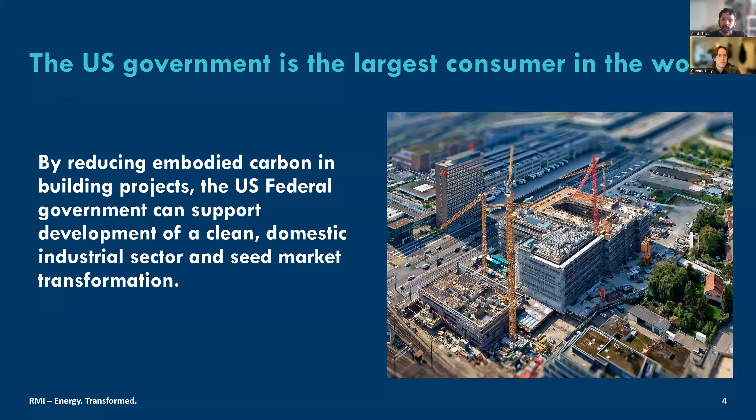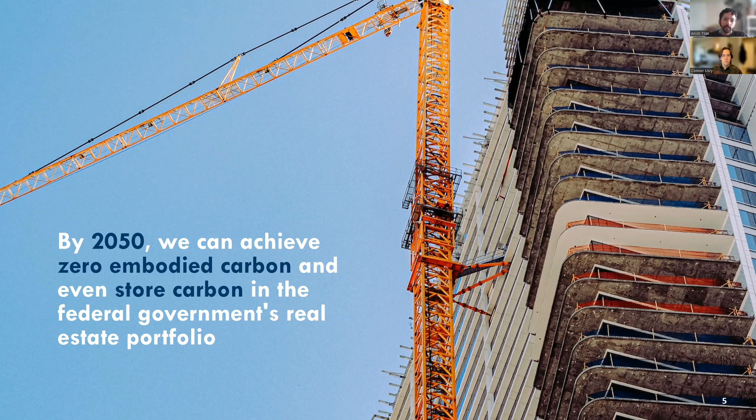Our top line finding from our analysis is that by 2050, the federal government can achieve not just zero embodied carbon from building projects, but actually we can store carbon in the federal government's real estate portfolio. So that's a really exciting opportunity and unique in embodied carbon.

So our agenda for today is that we're providing a broad overview and some context of what we did. And then we'll dive into some details about Buy Clean, which many of you have likely heard about. That's an increasingly common policy to address embodied carbon in the built environment. So we drill into some details about Buy Clean and what's happening at the federal level under the Biden administration. And then we'll touch on some of the strategies to address embodied carbon beyond Buy Clean, looking at buildings more holistically and thinking about other strategies beyond focusing on specific material sectors.

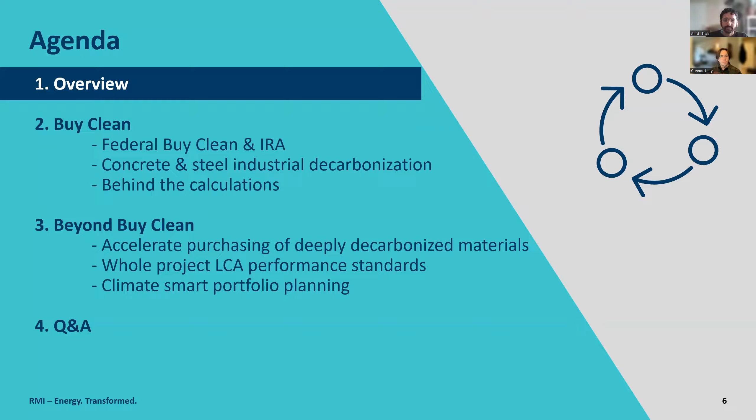So while we focused our analysis in this specific report on the US federal government's portfolio, we believe that the information in the report is really a comprehensive framework for addressing embodied carbon that policymakers at the local and state level, as well as private real estate portfolio owners, can also use. So this isn't so niche that we're focused just on one portfolio. This is really something that anyone should be able to pick up and deploy in their real estate work.

And with that, I'll hand it off to Connor to just give us some context and get into Buy Clean. Cool, thanks, Anish. So before we jump into some of the calculations, I just wanted to give a quick refresher on what embodied carbon actually is for those of you who are a little less familiar. So embodied carbon is the carbon in construction associated with the lifetime of a building. It ranges from raw material extraction to the emissions during transportation of materials, all the way to the end of life when you're dealing with deconstruction, disposal, or recycling of materials. So essentially everything outside of the operational carbon that's used.

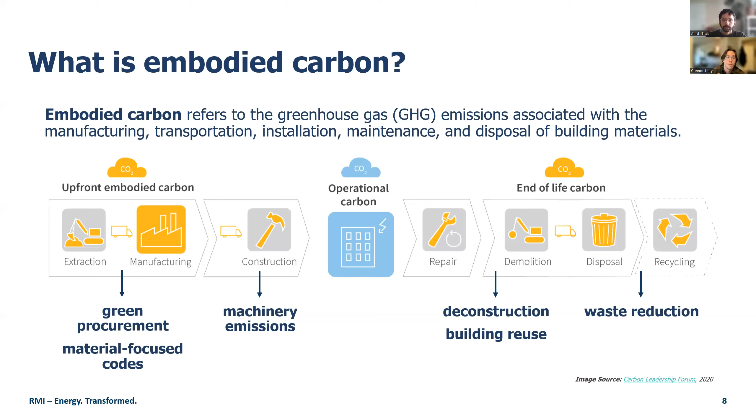Next slide. So embodied carbon is really significant. The emissions from concrete and steel industries alone account for about 21% of total global emissions. And most of the products from these industries are being used in the built environment. So as a result, policies that target these emissions, such as building code language and procurement policies, are really effective in addressing and reducing some of these emissions.

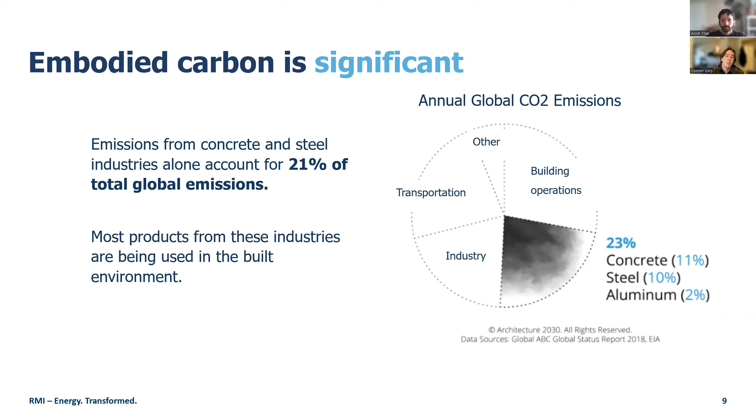But we should be looking at this not only in terms of having really large greenhouse gas emissions reduction potential, but also as an opportunity to reap a lot of different co-benefits. That's anything from improving air quality and pollution levels in areas near industrial manufacturing, all the way to supporting regional and local manufacturing and innovation. And it's also really cost effective. RMI has produced a couple of reports of late that have shown that emissions from materials we purchase for construction can be reduced by up to 46% with little to no added cost. Next slide, please.

So, in order to actually get the federal government to reduce its embodied carbon emissions, our team has developed a roadmap that's based on 4 primary strategies. The first, and the one that the government is really actively working on already, is developing a robust buy clean procurement program, which sets emission standards and targets for building materials, especially the large and important ones that we'll talk about here in a bit.

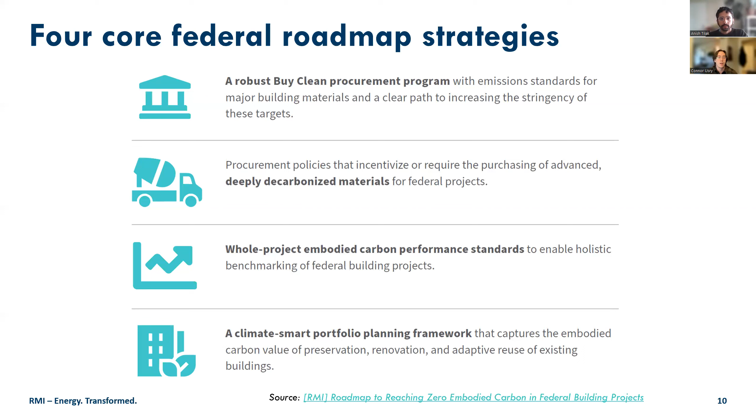The second is investing in the future of building materials by setting procurement policies that encourage the use of deeply decarbonized building materials for federal projects that's outside of the typical ones. The third is setting whole project embodied carbon performance standards to look beyond individual building materials and consider the project as a whole. And then lastly is setting a portfolio planning framework that'll capture the significance of embodied carbon throughout the various stages of the life of a building. Next slide.

So our roadmap focused on 2 core ways of approaching embodied carbon evaluation and reduction. We'll dive into those specifics throughout the next hour, but I just wanted to highlight the estimated impacts up front. So the first impact projection is from widespread implementation of buy clean targets that we're going to recommend. And then the second impact projection is that we see even greater potential for reduction by emphasizing performance standards through whole project lifecycle assessments rather than just focusing on individual materials.

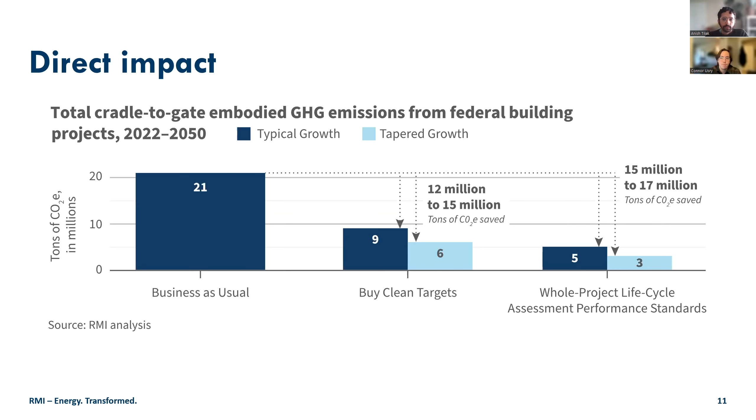All of this is going to be in relation to projected emissions that we calculated that the federal government will emit if it operates its portfolio in the same way that it already has been. Next slide. So first, we'll take a look at that buy clean approach that I mentioned in the first part of the last slide.

So buy clean as a whole, what is it? Buy clean is a policy that is being used or evaluated at least in a number of different states across the US already. Essentially, what it does is it sets procurement standards for common carbon intensive building materials. And since the government, as Anish mentioned before, has enormous purchasing power, its procurement stipulations can help drive the market

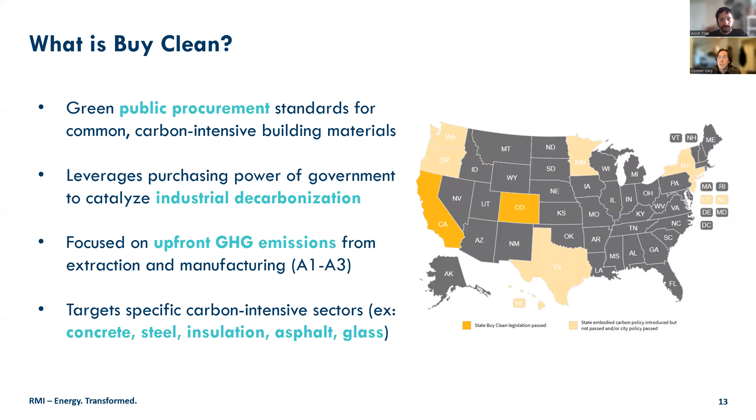towards lower embodied carbon. It's focused predominantly on the upfront greenhouse gas emissions of building materials from the extraction and the manufacturing, but it still yields results throughout the lifespan of a project. And it targets really specific carbon intensive sectors, such as concrete, steel, insulation, asphalt, and glass. Next slide.

So what does this mean for the federal government in particular? Well, the federal government is the largest consumer in the world. It spends somewhere in the range of $650 billion on products and services every year, and it has a portfolio of about 2.8 billion square feet. So a push to procure lower embodied carbon materials will actually help shift the US market as a whole towards those lower embodied carbon materials.

Last fall, in 2021, the Biden administration issued an executive order making buy clean a priority for the federal government, which was a huge step. And what that stated is that the federal government is going to focus on developing pilots for low embodied carbon procurement in order to push those lower emission standards for key materials. Those key materials, I'll cover in a second.

But this fall, after assembling a task force across various federal agencies, they stated that those materials were going to be concrete, steel, asphalt, and flat glass. And those are going to be the priority projects or priority materials for buy clean. In addition to those pilots, the executive order stated that they were going to focus on collecting and publicly disclosing environmental performance data. And they're also going to be streamlining emissions reporting as a whole. Next slide.

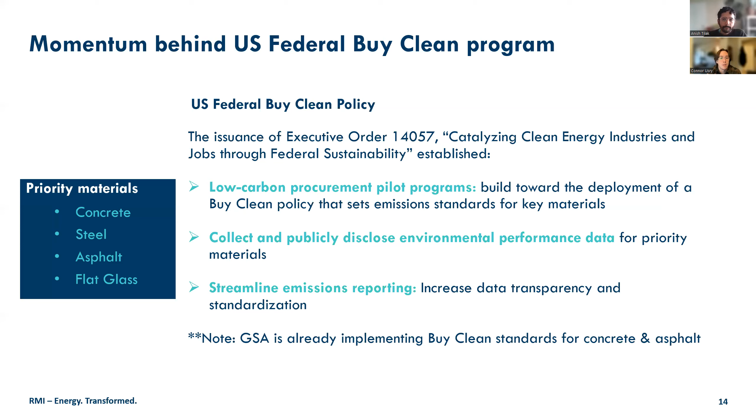So the priority materials that Buy Clean announced came on the heels of the historic Inflation Reduction Act, or IRA, this fall. And among a lot of other things, it's going to advance the market for low embodied carbon materials in buildings through a few different levers. The first is a $250 million program that'll help building manufacturers develop environmental product declarations, or EPDs. These are something similar to nutrition labels for materials to help people understand how much carbon is being used in the production and transportation and use of them.

$100 million is going to go towards supporting the creation of a national eco label for low carbon materials. That's similar to the successful Energy Star program that you see stamped on the back of washing machines and dryers and microwaves these days. And then in addition to that, there's going to be $2 billion that are put towards enabling the GSA to buy and to use low embodied carbon materials for construction projects.

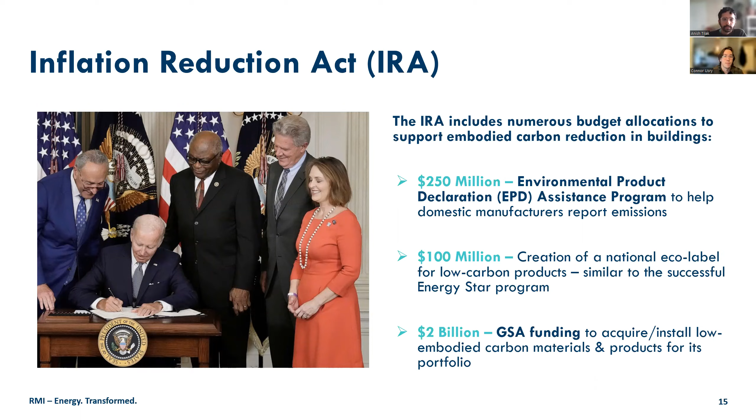Next slide. So shifting back to RMI's efforts to try and help the federal government achieve some of their goals. A federal buy clean pathway, like the one that we actually proposed in our report, is going to set the US government on the right path towards reducing emissions over time.

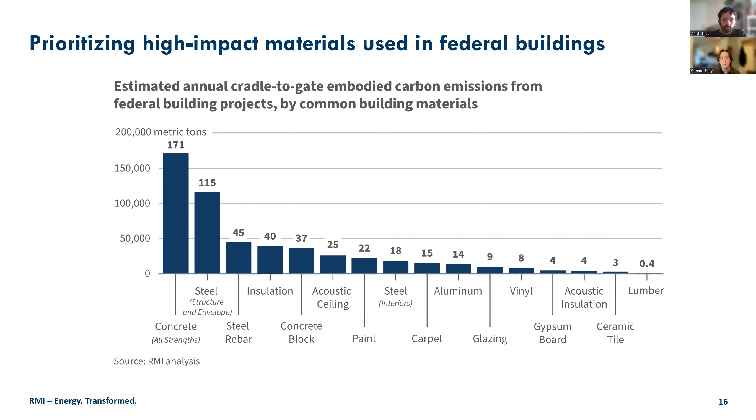So a huge part of buy clean is being able to set benchmarks and reasonable emissions expectations for different materials. For concrete in particular, what we did is we took a look at the global warming potential, or GWP, benchmarks for concrete ready mix products that are already available in the US.

So we set our 2022 benchmark in the US based upon the median environmental product declaration values that were put out by the National Ready Mix Concrete Association, the NRMCA, as well as the Global Cement and Concrete Association, GCCA. Those are roadmaps that are put out and deemed reasonable by the actual concrete manufacturers themselves.

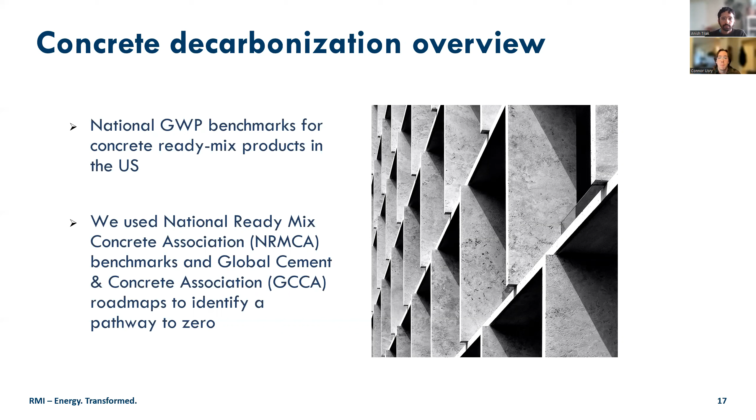So using that 2022 benchmark, we applied reasonable expectations for concrete technology improvements over the next few decades to achieve decarbonization. These included efficiencies in concrete production, savings in cement and binders, savings in clinker production, carbon capture, utilization, and storage, and then finally recarbonation.

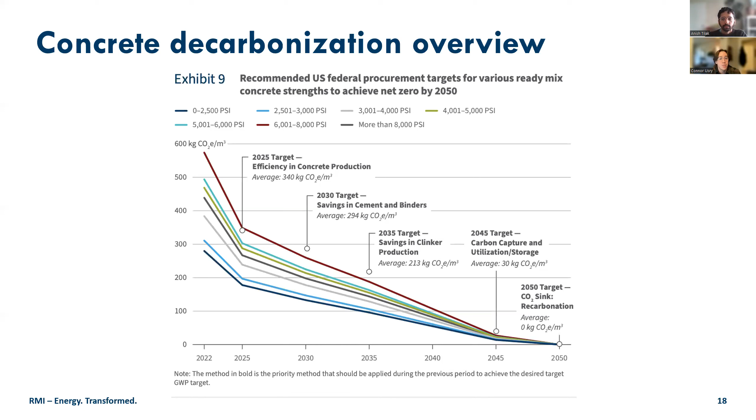Producers should find that these targets were set on a pretty reasonable timeline, given that the methods were consolidated from existing and industry inputted roadmaps. And why it's so important to have a roadmap like this is that it adds transparency to the producers of the products. And by setting these guidelines clearly, the federal government lays out what the expectations are going to be coming down the pike. Anish, if you can go to the next slide.

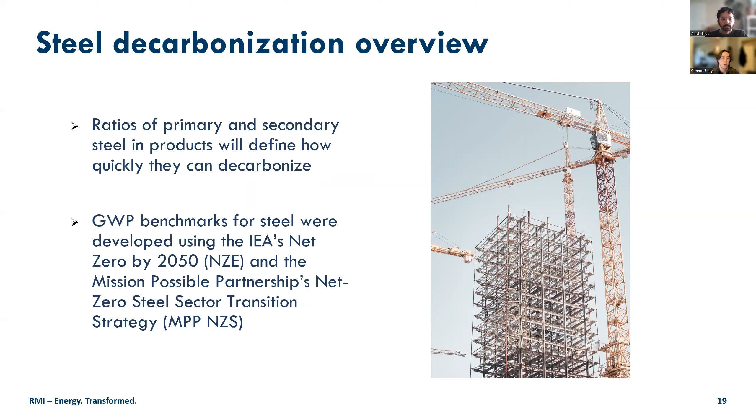So to jump into steel, we applied a very similar methodology that we did to concrete. So our analysis averaged the assumed percentage reductions from two major industry roadmaps, the IEA NZE and the MPP NZS pathways, as decade over decade scenarios to project reasonably aggressive paths towards net zero procurement of steel in 2050. If you go to the next slide.

Steel products have different paths to zero based upon their ratios of primary and secondary steel. That said, the methods responsible for decreasing embodied carbon from steel across the federal government come from the same primary levers. And those were increasing secondary steel content, electrical grid decarbonization, material efficiency improvements, technological improvements in the actual production itself, and then carbon capture, utilization, and storage.

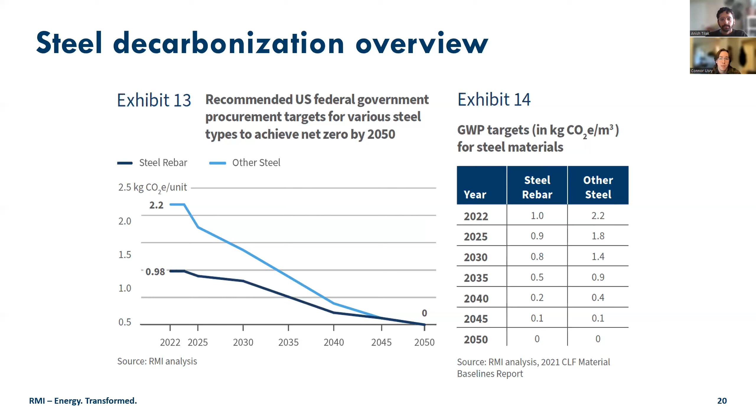Now, we obviously threw a lot at you there, but the report has a much greater level of detail and in-depth breakdown as to the explanations and the assumptions that went into these. Anish, if you can go to the next slide.

And we took a look at each of those individual materials and we drew a pathway for each of those industries to get to zero by mid-century. And we did this using internal analysis that was built on the back of GWP benchmarks from the Carbon Leadership Forum's Material Baselines Report.

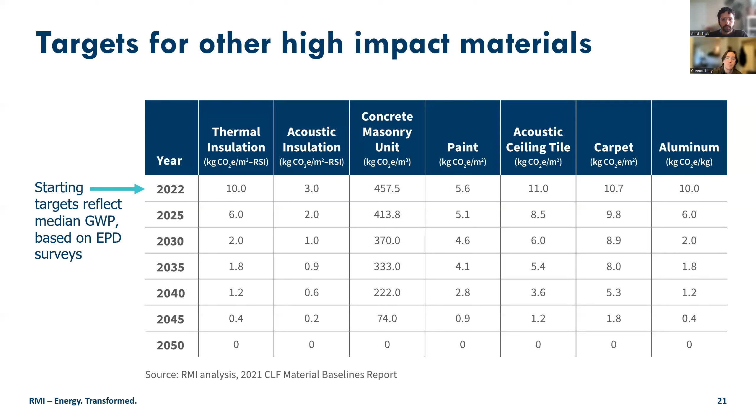The analysis recommends that emissions targets are going to be tightened over time, right? And using this roadmap, we believe that the emissions from federal buildings can realistically hit zero carbon or perhaps carbon positive by 2050. Anish, if you can go to the next slide.

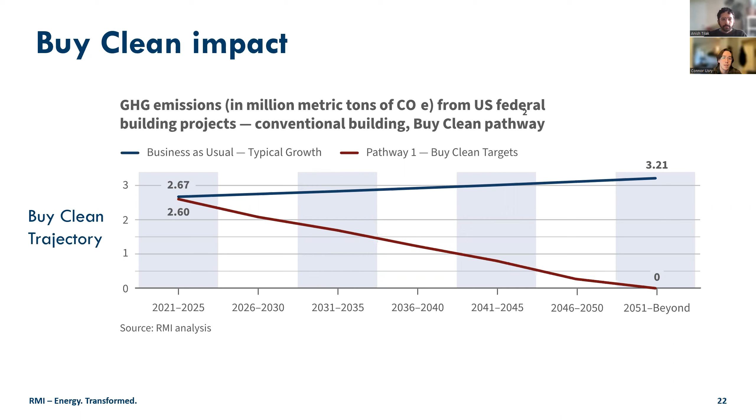Now, obviously, this seems like a huge task, but what Anish and I will do here briefly and then more in depth in the report is that we can take you behind some of those calculations and show you how we got there to get a little bit more clarity. You can go to the next slide too.

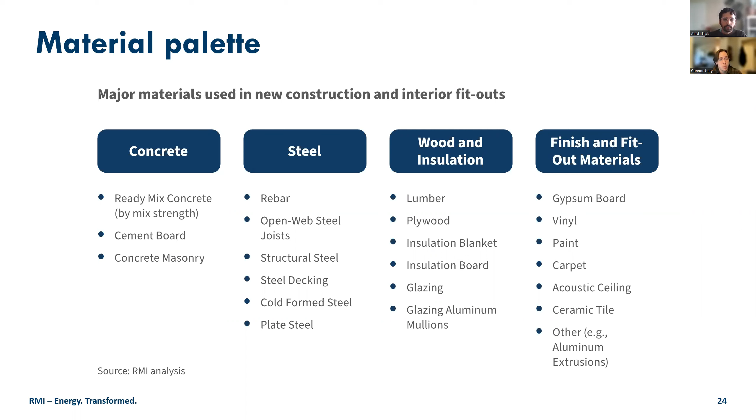So our first step was essentially moving beyond that first round of materials that we spoke to. So what we did is we took a look at a swath of building materials that are used in new construction and interior fit outs for federal construction. And then we evaluated the global warming potential in each of the largest building types in the GSA portfolio. If you go to the next slide, I'll detail that briefly before tossing it over to Anish to continue.

But we've been talking a lot about the individual materials of a project. And if we zoom out and we take a look at this whole project view, these are the types of projects and what elements from each we actually included. So the federal government does a lot of interior fit outs. They reuse a lot of existing construction in addition to new construction. So it was really important that we quantified the impacts of fit outs beyond the actual core and the shell modifications that you might make.

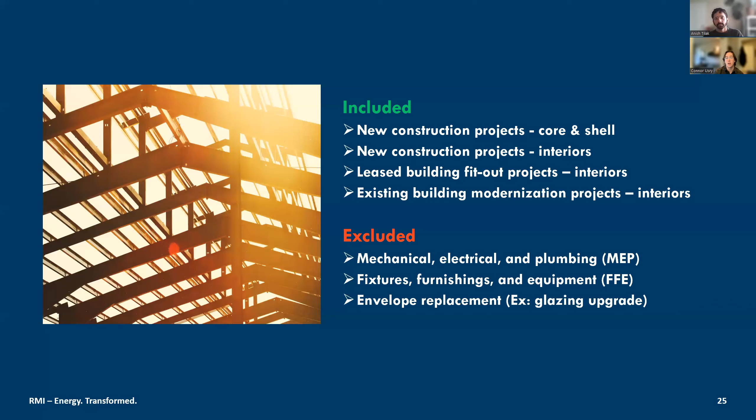Now, that said, no modeling and no analysis is completely holistic. So there were elements of our scope that we were not able to include, and those were mechanical, electrical, and plumbing emissions or carbon emissions from embodied carbon, fixtures, furnishings, and equipment, and then envelope replacements. And the reason for that is that those are gaps in how embodied carbon is being evaluated. And right now we hope to be able to move into looking into that in the future. So at this point, I'm going to hand it back off to Anish, and he'll talk a little bit more about what went into the calculations.

Thanks, Connor. So for the next few slides, we'll dig a little bit more deeply into our analysis and explain some of our key assumptions. Because in this space, there's a lot of information being thrown out, and we want to be very clear about what is in our analysis, what's included, and what our assumptions are. So our key data sets that we are using for our quantification of the embodied carbon impact of the federal portfolio are these three key items.

So the first one is we need to develop what the prototypical material usage is. So how much of what material is the federal government using for its building projects each year? Our key data set for this is using some prototypical building project profiles from RSMeans. RSMeans is a common cost estimation tool used by contractors, and they have a robust data set of prototypical buildings, which we used to kind of develop what the material quantities for typical building projects and interior fit outs look like. The second piece is the emissions benchmarks for those key material categories.

I think Connor spoke to this in a good amount of detail, but just to clarify that once you have a quantity of materials, in order to get to an emissions estimate, you need some benchmarks for what the average emissions of those products are. So our key data set here is the Carbon Leadership Forum's 2021 EPD benchmark survey. And CLF has a number of great resources and are constantly working on updating data sets like this. And I believe that they're actually updating their benchmarking report at the moment. So just wanted to point out that these are using the 2021 values, with the exception of concrete, where we did have more recent data from NRMCA.

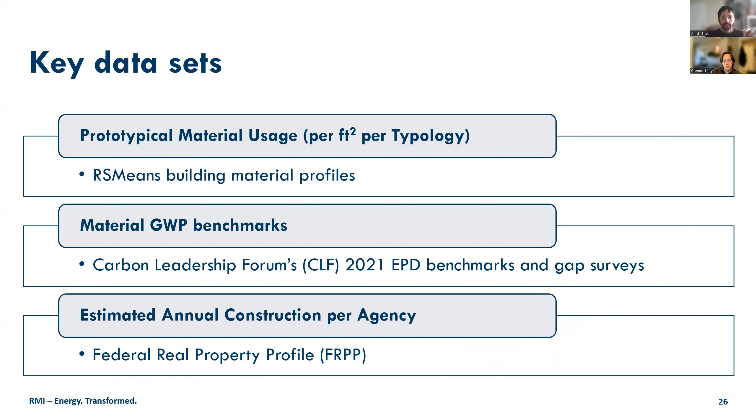So the first two, the prototypical material usage and the global warming potential benchmarks, are put together, and we've been able to create some prototypical cradle-to-gate embodied carbon benchmarks for building projects. So the charts that you're seeing on your screen right now, the left one is a cradle-to-gate embodied carbon estimate per square meter of ground up new construction by different structural types.

So from left to right, we're looking at a typical new construction commercial concrete building, a commercial steel building, a commercial light framed lumber building, and then on the right are more of an industrial or utility program type. So a concrete construction for a utility building, and then a steel construction for utility building.

So these are whole project embodied carbon benchmarks. We want to clarify that these are cradle to gate, so they're not what a true whole building life cycle assessment is intended to capture. But these are reasonable benchmarks for what the median embodied carbon impact of projects are. On the right, you're looking at a detail of interiors alone. So for a commercial project and a utility project, what the breakdown of interior materials are.

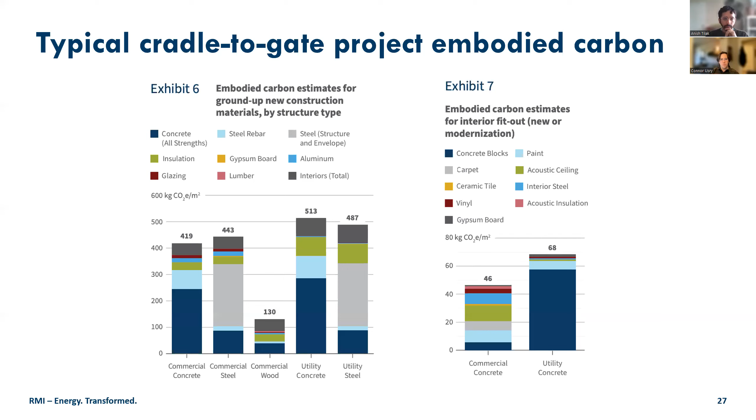So these are some early benchmarks for the building industry to use. There's a lot of effort underway by researchers to create benchmarks for whole projects. And we encourage portfolio owners and policymakers to reference these benchmarks or test them out as you're trying to estimate what the cradle-to-gate climate impact of your project pipeline is. And so while the next step in this analysis is specific to the federal government, the analysis preceding this and the benchmarks can be used by all folks in the building sector.

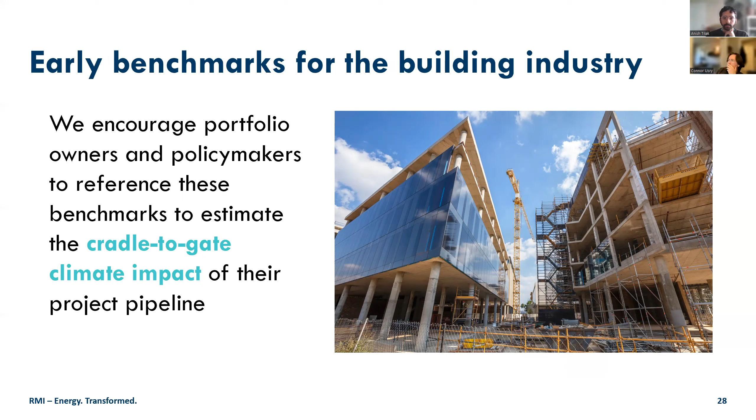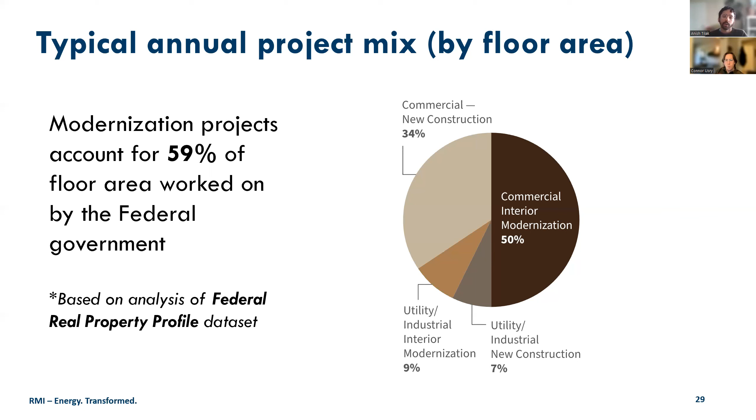And so the median insulation product may not be that great, but there is a very simple choice that contractors have to make to a low carbon insulation product. And so theoretically, the 7% that's for insulation could be dramatically reduced with just a change of product choice. And beyond that, we're looking at additional concrete products, concrete masonry, acoustic ceiling, paint, and carpet.

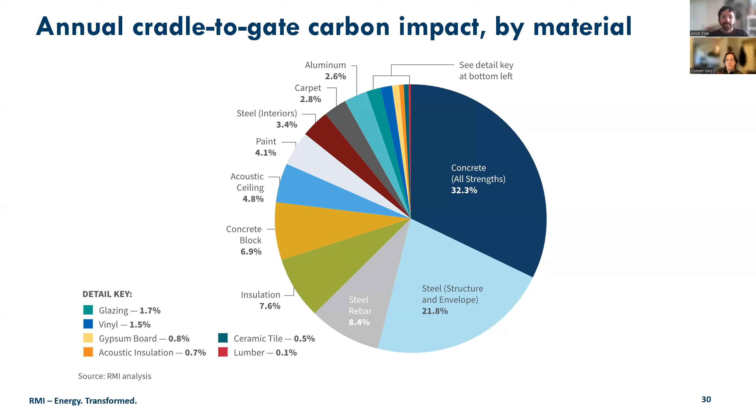So while we were focused on Buy Clean and really providing some key recommendations to government stakeholders for next steps on Buy Clean, we also wanted to be comprehensive in our recommendations for how we think the federal government should address embodied carbon.

The first key piece is the importance of investing in deeply decarbonized materials. While near-term actions on Buy Clean are bringing the floor up for the industry, creating benchmarks to eliminate the worst performing products from an emission standpoint, we need to be seeding the next generation of advanced materials so the federal government can realistically move along that trend line to get to zero by 2050. Right now, we believe it's important for public demonstration projects, competitive bidding protocols, potentially minimum quotas for advanced, deeply decarbonized products, and other strategies to be used to seed investment in those technologies.

For Buy Clean, that's looking at low carbon ready mix concrete beyond what's the median in the industry today, investing in disruptive low or zero carbon cement products that are the future for the concrete sector, doing demonstration projects to pilot performance of those products, and setting some targets to procure low or zero carbon steel as those products start to come online. We believe this is a place where federal funding could be beneficially allocated to catalyze markets for deeply decarbonized products.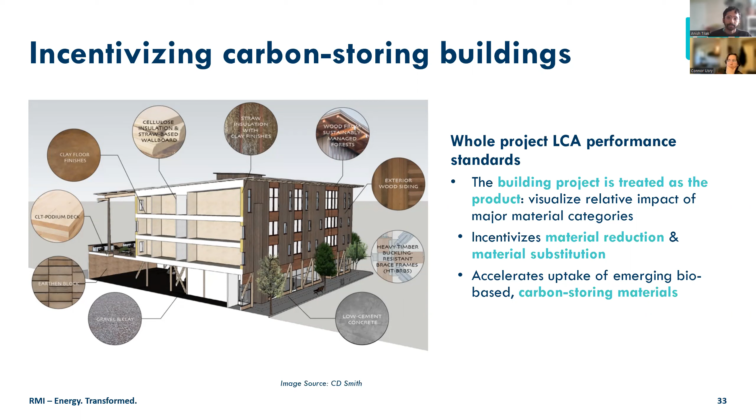And finally, we can't leave without mentioning the importance of saving existing buildings, repurposing existing buildings. One of the best ways to address embodied carbon is to minimize the amount of materials you're using in the first place. So we did model a portfolio planning approach that the federal government could pursue, which prioritizes renovation of existing buildings to accommodate new growth versus new construction. In some ways, we believe the federal government is already headed in that direction.

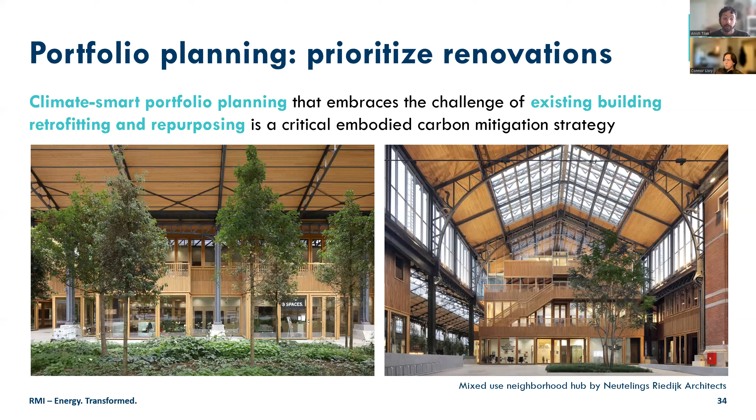Due to changes in the workplace after the pandemic, from our estimates, the true growth projection for the federal portfolio may look closer to what we've estimated as the climate smart portfolio planning framework rather than the business as usual case.

It's challenging to fully eliminate concrete or steel from the building sector. So Buy Clean is an important piece of the puzzle, but we think a holistic framework is an important complement to that.

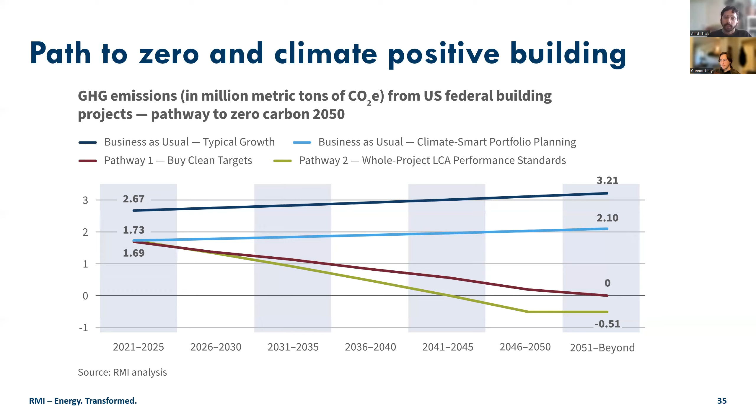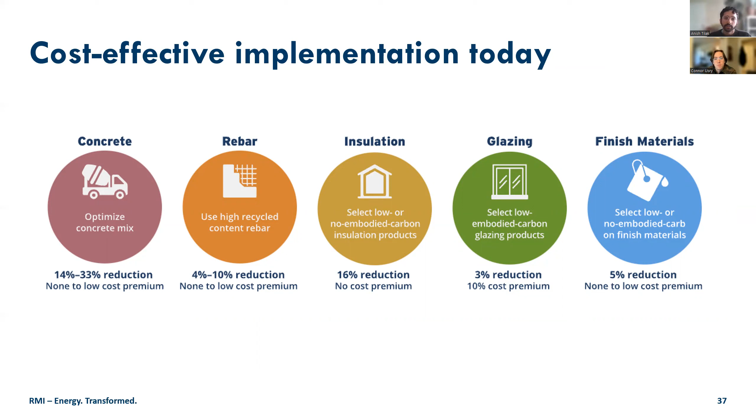We have more resources on embodied carbon on our website. We have a deep dive into concrete solutions for those who are interested in that material category specifically. That's what we have, so thanks for your time.

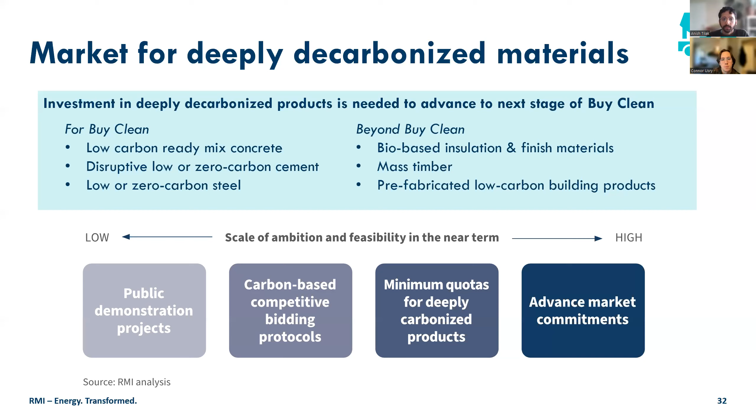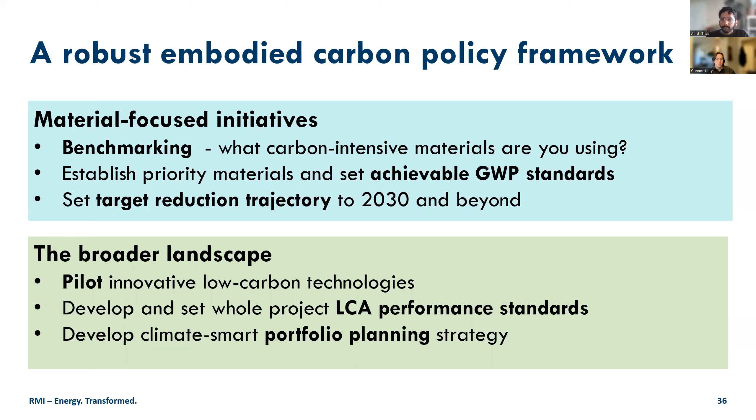Any last questions, Chris or Connor? Any last things we should share with folks? No, I don't believe so.